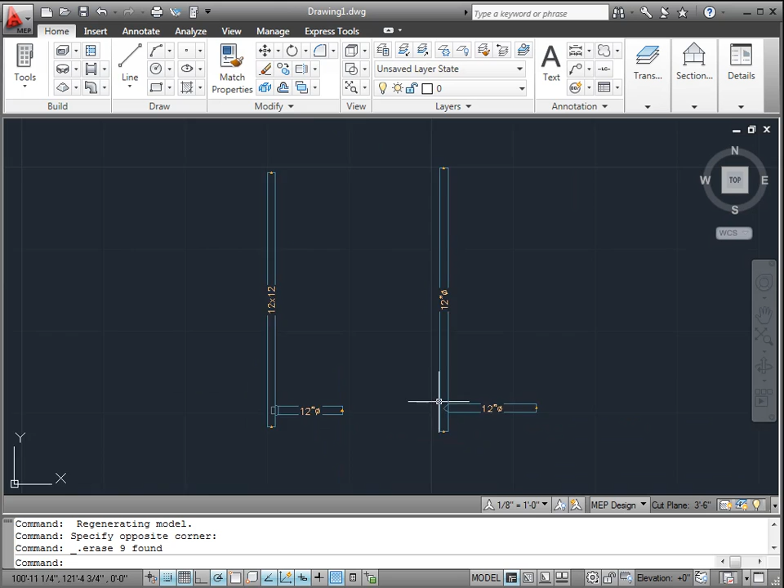So where we left off, we were going to start discussing a little bit about some of the solutions, and before we start solutions, let's also show some of the other takeoff types. So let's delete these real quick. And we're going to come and throw in, let's do this on the rectangular duct, just to simplify things a little bit so that we don't see these contours everywhere like right here. That's more there for round and oval.

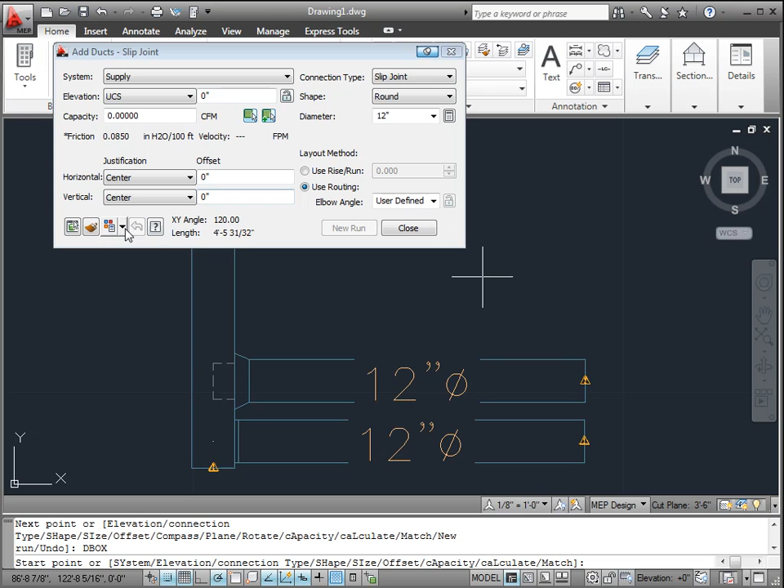So let's go add new duct. And we've got a conical one on there. Just for the video, let's add in a flat one. And we're going to add in a beveled one. And we're going to add in a bell mouth. New run. Make sure that we're still on bell mouth. We are. Good. All right.

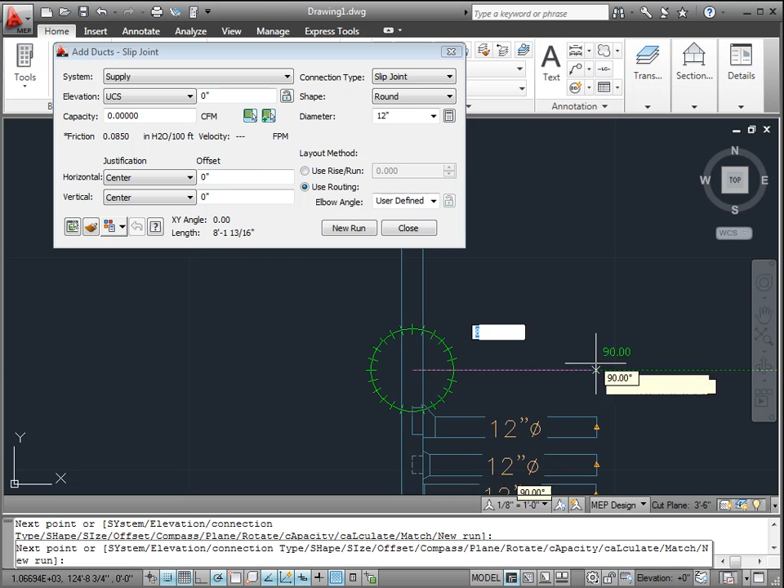Okay. So here's some of the various shapes of takeoff that we have. And you may notice also that from earlier versions, the length of these takeoffs are more accurate per SMACNA standards. The cone here used to be really long and it looked rather nasty, but now it's been shortened down. Most of these are either 4-inch or 6-inch, and the bell mouth looks more like a true shape of a bell.

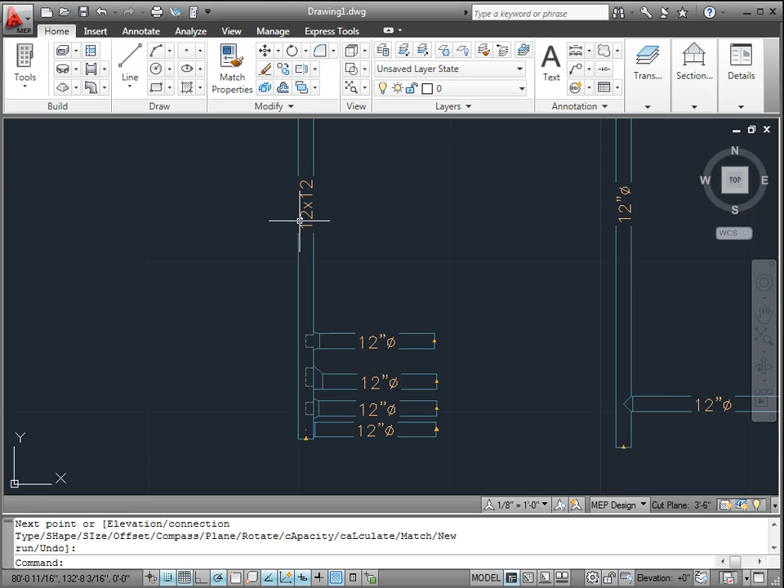But you can see that, as the diameter of the branch is close to the diameter of the duct main that you're connecting in, these flares, as they flare outwards, it's not going to work. And it's not going to work for some smaller sizes too. So let's, like this bell shape, we'll leave it on that, and let's just change this to a 10-inch diameter.

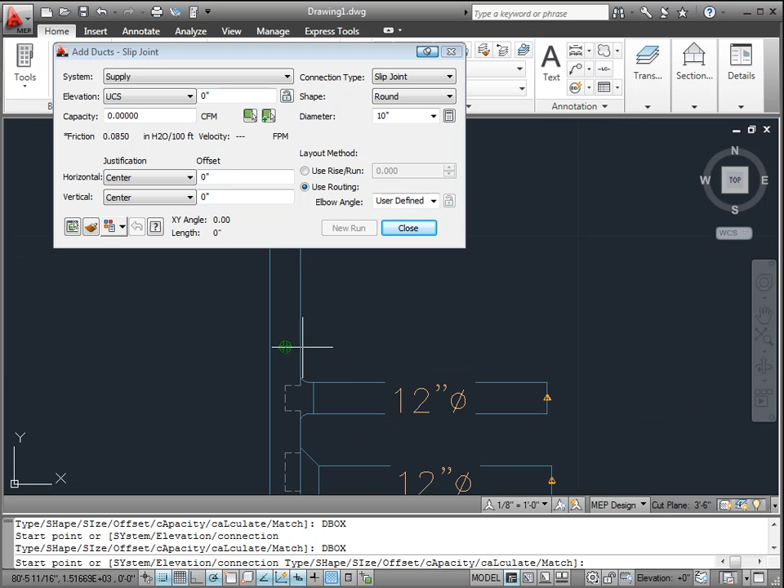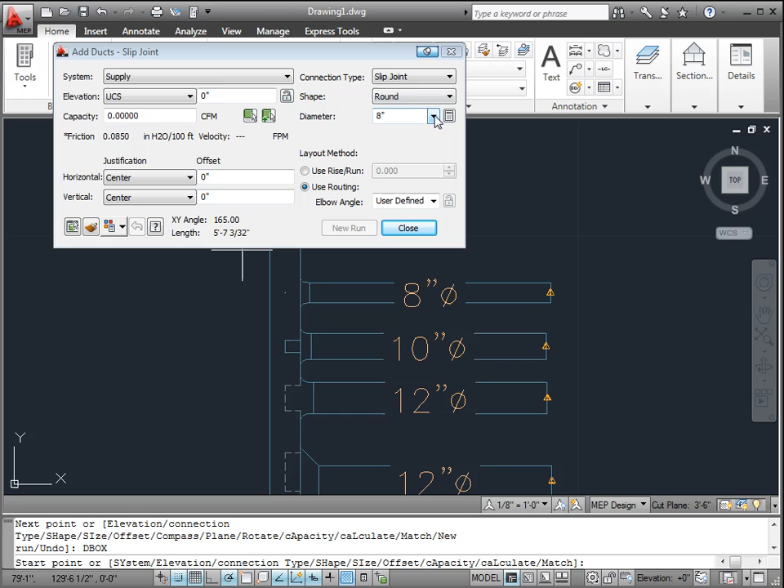So you can see that the square is smaller. It's not going to stick out of the edge of the duct as much, but it's still going to stick out some. Let's stick in a slightly smaller one than 10. And let's go down to an 8-inch. So the 8-inch just barely fits there with that bell mouth type of connection.

So reducing the size of your branch is one option, but usually it's not a design option. I've got so much air I need to push through a branch, I can't just reduce the size of my branch. And that's where we need to start talking about either increasing the size of our main, changing the shape of our main, changing the shape of our transition, and

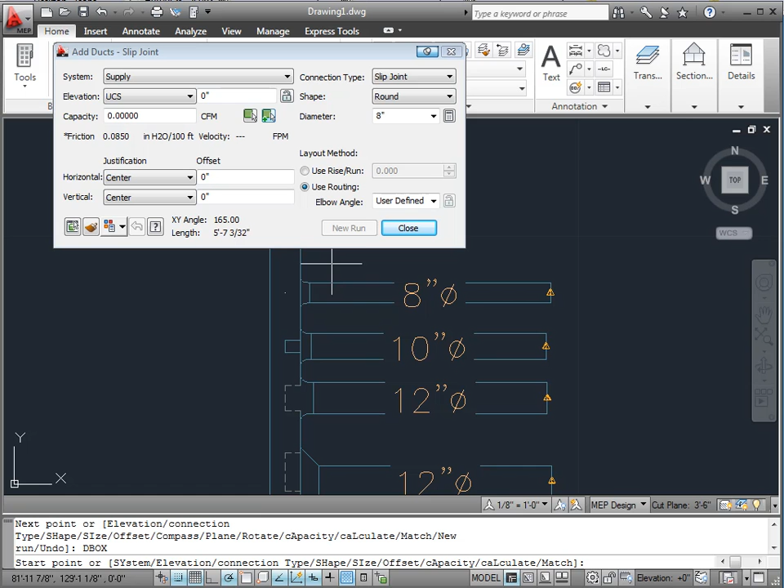other options. So a shop fabricator might say, well, yeah, this might look correct, but it's still not going to fit properly. And the reason is these takeoff fittings still need about 1 inch of meat on this duct main to get their teeth in there, and they bend these tabs outwards, and so you still need about another inch